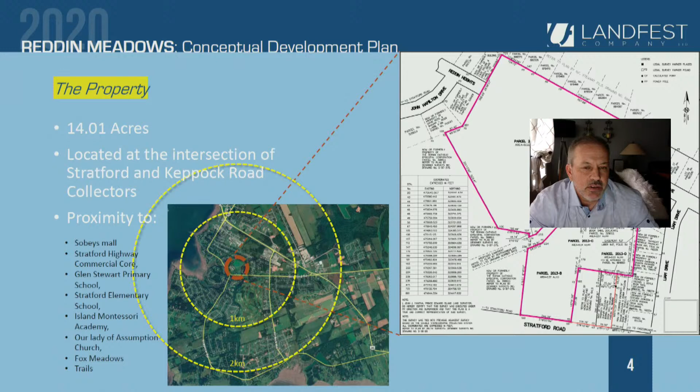I did want to refamiliarize you with the property. We've got roughly 14 acres of land located at the intersection of Stratford and Keppock Road collectors. For those of you who were at the November meeting, some of this presentation will sound a little familiar, but we anticipate there's probably some new listeners, so we're going to reintroduce some of this.

We think this is a pretty unique site, in part because of its proximity to Sobeys, the Stratford Town Centre, the highway and commercial core, and a number of elementary schools around it, including the Montessori Academy, Fox Meadows, and the AT trail that runs right through it. We believe this is a great parcel that could accommodate some density and would provide benefits, being close and within walking distance of all these facilities.

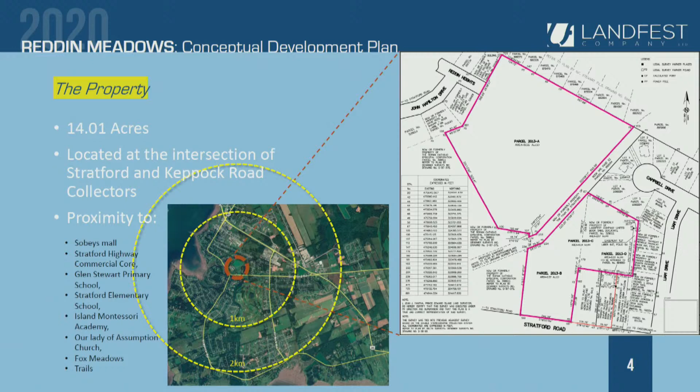Just to step back and give you a sense of how close we are to Sobeys and the highway - the AT collector runs and actually bisects the site, and the arrows there are indicating some of the drainage lines. We're fairly advantageous that this property drains into itself and not onto other properties, draining to that AT collector into a drainage swale that runs down south of the Assumption Parish.

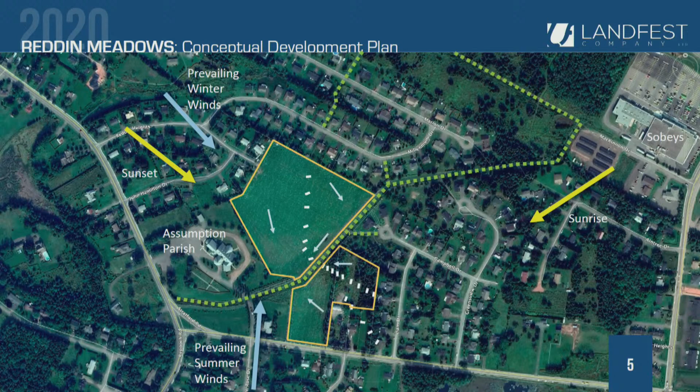As well, you'll see some yellow lines representing where sunrise comes up and sunset. The prevailing winds come from the south-southwest in the summer, and from the northwest and western directions in the winter.

When we looked at this property, its current zoning as R1, we were looking at the highest and best use. What we're proposing here is to move from 3 units per acre, which is permitted under the current R1, to a 5 unit per acre development. Previously, we had requested a 7 unit per acre development.

Looking at this urban transect, we are in an area that would not be considered rural. We're at the fringe of a suburban and a future urban generalized commercial zone. What we're proposing is a range of housing types to provide a range of housing affordability - in this case, some slightly smaller single-family homes and townhomes.

We have removed the multi-unit apartment building that was part of the original plan, and some of the semis that were part of the original plan. But we're still proposing a walkable neighborhood with sidewalks on one side of all of the streets. We want to preserve that unbroken trail corridor, that AT connector that runs right through the center of the site. And we're proposing a much increased open space. A 10% parkland dedication is fairly typical, but we're proposing a 30% parkland dedication with a forest preserve and some stormwater management areas.

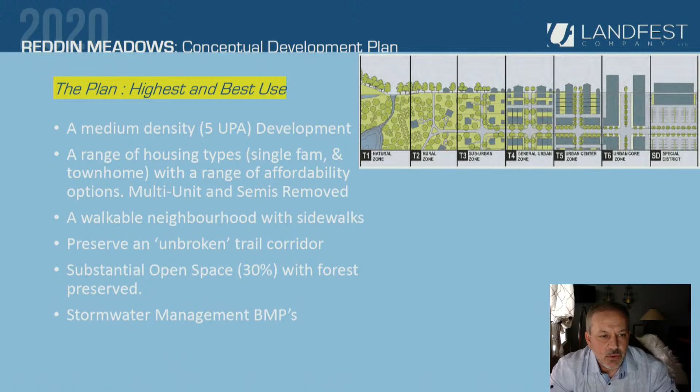So the land is currently, as Kevin noted, zoned as R1, and we're proposing to rezone it to PURD, which allows a little bit more flexibility in the housing types, unit types, and the affordability of units.

I did want to reiterate, back in our presentation in November, that Prince Edward Island continues to be the fastest growing province in Canada based on the last census, and Stratford is the fastest growing community at 13.2% in PEI, trailing just 2 other municipalities in all of Canada. So that rapid pace of growth, and trying to accommodate it in the best way possible, is part of the impetus for this plan we see tonight.

I did want to talk a bit about the difference of sprawl and urban growth. There's been a lot of writing and a lot of videos on this topic, and most planners consider urban sprawl one of the single greatest threats to environmental and economic sustainability.

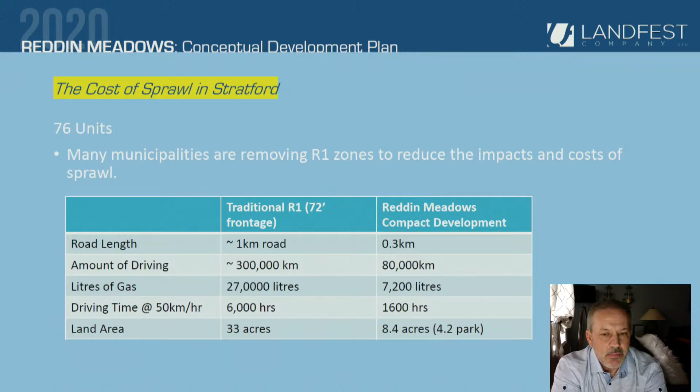You have to remember that on this 14-acre parcel, 30% is proposed as parkland, so about 4.2 acres are park. So when you compare the traditional R1 form to what we're proposing as a very modest change from the traditional R1, the benefits are fairly significant for the community.

So if we move to the next slide, again just reiterating, we're looking at creating a walkable community, moving from 3 units per acre to 5 units per acre.

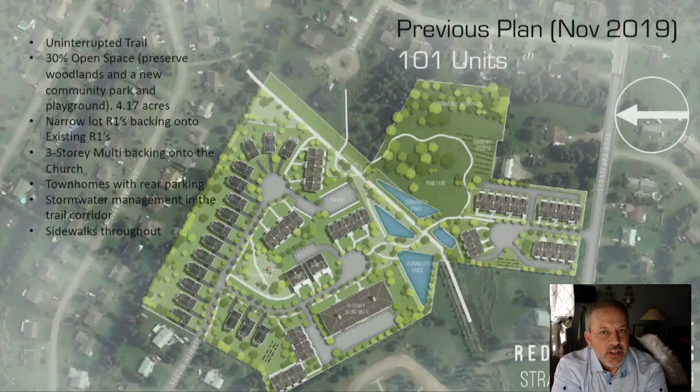If we move to the next slide, the old plan that was presented in November of 2019, you'll notice at that time we had proposed to maintain the AT network through the site, with stormwater ponds that were going to be park-like features but would also control runoff from the entire development. We're proposing 3 cul-de-sacs as part of this development, and part of that plan was to split some of the traffic onto Reddin Heights and onto Stratford Road, so that not all the traffic was moving through, eliminating any shortcutting through the neighborhood to get to other parts of the community.

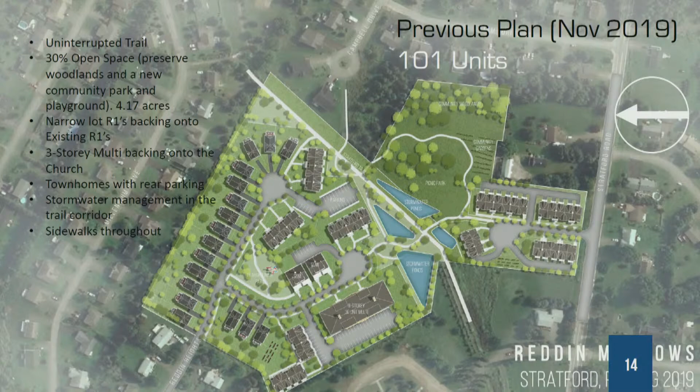So the new proposed plan, which you see here tonight — what you'll see is we've moved from the R1s proposed as 40 foot of frontage, and in discussions with the Planning Advisory Committee we've moved that back to 48 feet.

That eliminated one of the R1 units that backs onto Millennium Drive. We moved from a 3-foot and a 12-foot side yard, which we had previously, where the house is not in the middle of the lot, to now a 6-foot side yard and a 12-foot side yard.

So in total, we have 18 feet between each home. When we look at the current zoning requirement of 8 feet, that would create 16 feet between each home. So this actually separates the houses even more than the current R1 zoning, on a slightly narrower lot, from 72 feet down to 48 feet of frontage.

You'll also notice on this plan we've removed the multi-unit apartment building, replaced with townhomes. We've removed the 2 semi-units, replaced with a single townhome cluster. We had some properties where, for the most part, all the R1s that back on R1s now currently have R1s that back on the existing R1s. We had a condition in the southern corner where one of the townhomes backed onto the R1, and we've changed that plan and put an R1 in so that we can maintain all R1s backing onto R1s.

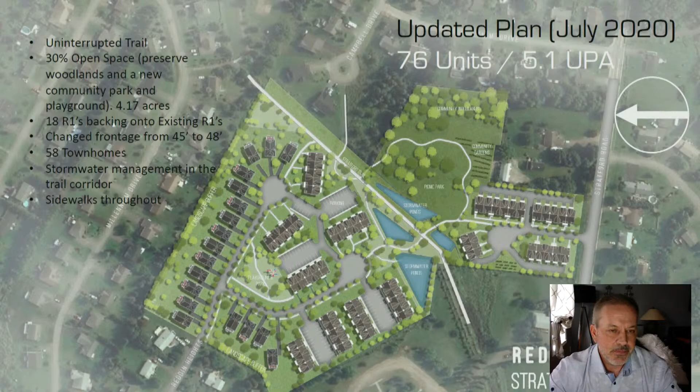We just had some views again. This would be kind of the sidewalk on one side, the street. You'll notice that we've pulled the townhomes and the R1 buildings a little closer to the street.

If we go to the next slide, we're proposing to require at least 4 trees on every lot that would be part of the development. And we're also proposing one caliper-sized street tree every 50 feet of road frontage on both sides of every street.

So the developer will be adding urban forest as part of this plan. On the left-hand side of the screen, you'll notice these new units, slightly narrower than the existing R1s. But what we've also done is pulled them closer to the street. There would be design standards to maintain the high standard of architectural design for these.

So what you see in this plan is any garages would have to be set back from the front of the unit so that we don't see all garages out front, and that homes would have verandas so that you're close to the street and able to talk to neighbors walking on these new sidewalks. So if we move to the next slide.

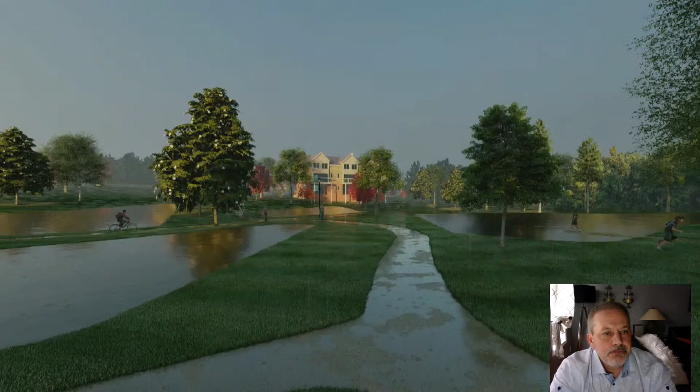And kind of a watery day looking at the stormwater management areas, which would be designed preliminarily as stormwater ponds as the site is being developed. These would hold any sediment and erosion control to keep any silt from moving from the site and keep it on site.

And then once the site is built out, they'd be transitioned into wet ponds. Some of them may be dry ponds. It depends on the drainage calculations and how much water can be provided as part of these.

But this is a view from one of the cul-de-sacs looking through that AT corridor. You see the bike path. And as part of the original plan, we thought it was more important to keep the connectivity of the AT connection without having to cross a road, rather than running the road through the middle of this and having people having to cross that road.

So that's part of the design scheme. Next slide.

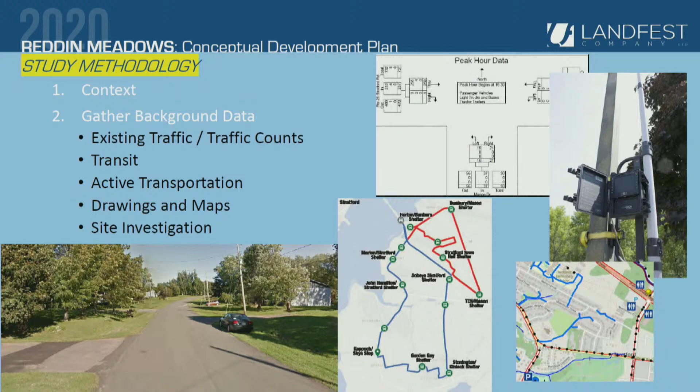It's called a Miovision, and it counts people, bikes, buses, cars, and trucks, allowing us to create a detailed traffic profile for the community. If you move to the next slide, we take that data into a traffic modeling application where we simulate the traffic using the existing counts, then add the new unit counts that will generate their own traffic, creating a very detailed simulation to look at impacts on all the intersections, surrounding roads, and regional road networks.

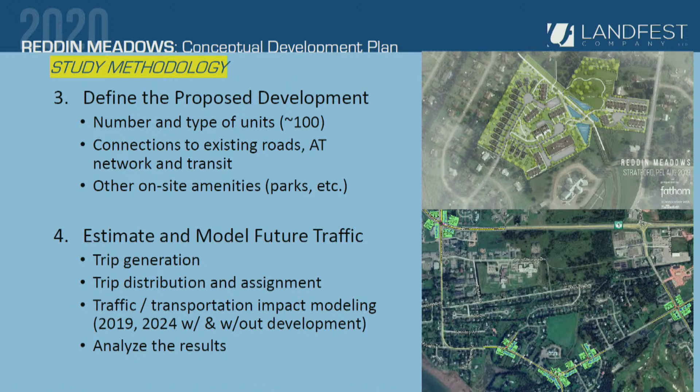And of course, this traffic study was done for 101 units. So if we move to the next slide...

What the traffic plan talks about is, very importantly, the connectivity of the Stratford Trail and maintaining the connected nature of the AT trail that runs through. The community already has excellent AT potential and transit connectivity, the development offers significant internal green space and amenities, and its proximity to schools means we don't have to get in cars. We can walk to Sobeys and to local schools on this connected AT network. The 76 units now generate relatively low volumes of new car traffic, and there is certainly available capacity on the adjacent streets to accommodate this new development.

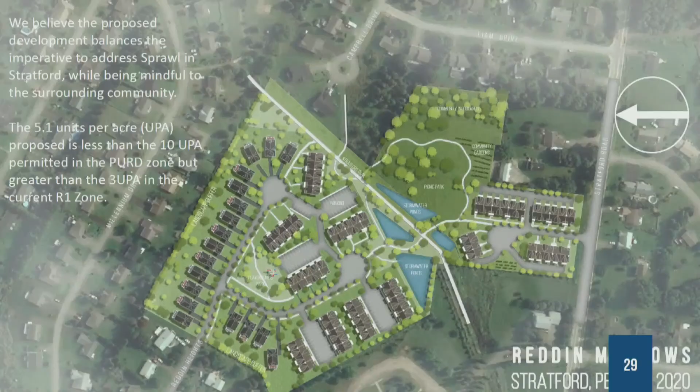If you look at the last home on Reddin Heights, which I'll point to on the screen here, right here, they are similar depths to the existing homes along Reddin Heights. It's just they're narrower along the frontage, with the exception of the ones up in the cul-de-sac.

Another issue I was told was when Millennium was being built, our septic is not deep enough, and one of my neighbor's septic was crushed with a big truck going up. And have they brought that into thought during the construction?

If John might be, if you want to run through your questions, we can make notes and then we can get him up to answer your questions. And the big one would be, is there going to be a second exit? One exit off is just unacceptable.

I don't know, Kevin, if anyone can speak to the history of that sewer line, or maybe what we can do, Ann, is get back to you on that particular piece and see if that would be an issue. We'd have to ask our infrastructure department on it, and I don't recall that, but it would be in a different department from where I work, so we'll certainly ask that question and get back to you.

My name is Danny Wood. I live at 29 Millennium. And I find myself here again, and I don't know why, because I haven't seen a whole lot of change from the first proposal that I was involved in back in 2019. Yes, the apartment building is gone, but it's replaced with townhouses in the lower meadow.

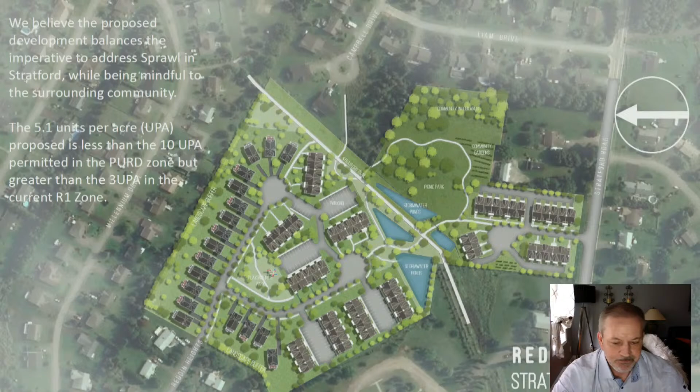Thanks, Rob. The mic is open. I did have a quick question come in from Bernadette Milner, 8 Keppoch Road. Once again, it's a quick one for John: will this development be done all at once or in a phased approach?

Well, two things. Back to traffic again, because that's obviously a concern for everybody in our community. It appears, and I think this came out at the last meeting, that there was a lot of concern about traffic in this area even without the development. That's where I brought up that we have to work with the town and the Department of Transportation on quieting techniques, because it sounds like they're needed there already. In order to accommodate more vehicles, and like Rob said, not many more than if we were just R1, we have to address this situation.

I was fortunate enough to travel in May to visit a new grandchild, and I was in Calgary in an established subdivision that had new artery roads built around it. I went around and looked at some of the quieting practices they've used—a lot of movable concrete medians and so on. I agree, someone said at the last meeting that a stop sign doesn't mean anything, people can roll through it. So we have to look at the problems and issues and address those, as Rob said, as a broader vision for the whole area, not just a magnifying glass on this one point.

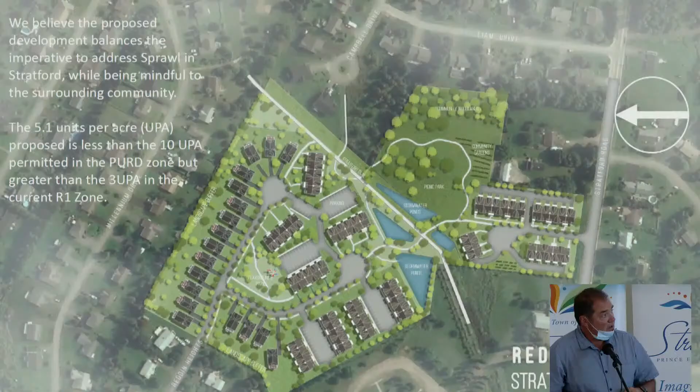As for the phased development approach, I call it A, B, and C. A being you develop off of Stratford Road first, which we hope would start later this fall or next spring. B would be the single-family homes in the central area and the central townhouses, and C would be the parcel and townhouses that border onto Assumption Parish. That answers that question. Thank you.

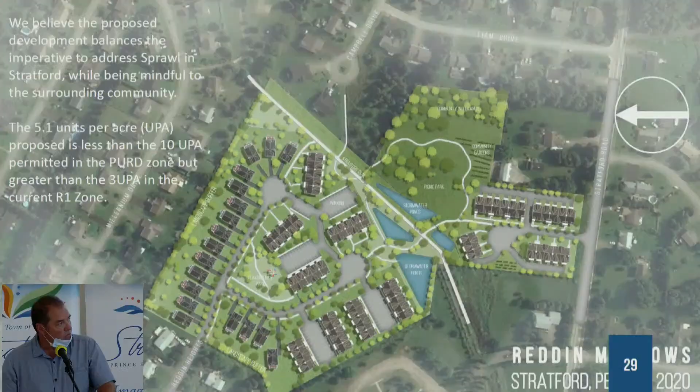The infrastructure, with the stormwater ponds and so on, we don't price until you have a set plan, so it's very hard to dictate a price at this point. But for a townhouse, for example, we're probably going to be $275 to $325 with today's current market. And for single-family homes, we're probably going to be $375 to $425.

I was just going to add, in comparison, look at what it costs to develop a 72-foot road frontage — that extra asphalt, 0.3 kilometers versus 1 kilometer, and you're on a bigger lot, a lot more costs. Doing a compact development is substantially less to build, relatively speaking.

All right, thank you. If you have any further questions or concerns, please email the planning department. Planning staff will be open to receive those for the next 7 days until July 22nd.

Next steps: we're going to receive all those submissions, and there's going to be a planning board meeting dedicated to this on August 3rd, 2020. They're going to take into consideration everything from the first public meeting through, and any comments received. There's no curtain put down after the first public meeting — every comment submitted since the start of this application will be reviewed and up for discussion. Coming out of that planning board meeting, if there's a recommendation that goes to council, then the next town council meeting for a decision would be August 12th, 2020. That's tentative, based on whether there is a recommendation that goes to council. And that's the next steps.

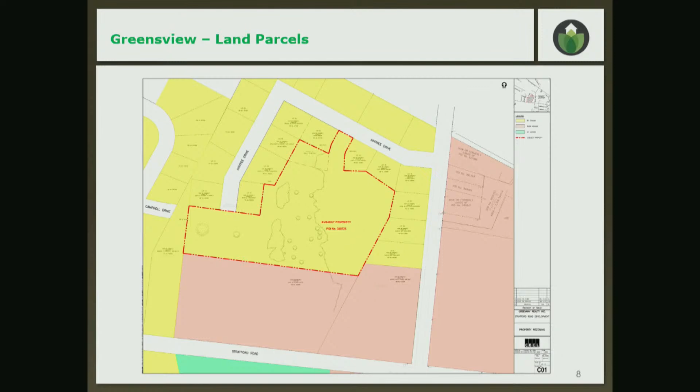So what we have up here right now is an overview of the land parcels. The rezoning portion of the development that Kevin is hoping to do is outlined in red up here. So that is sort of the remnant lands of this original subdivision when it occurred. When Aintree was built originally, there was a plan to have Campbell Drive come up through sort of a loop road up to Aintree and connect through there as single-family residential.

This lower area in pink is the existing PURD area. So what is being proposed is suitable for this area now. The upper area outlined in red would have to be rezoned to PURD to allow that entire development to happen.

The drawing that you guys were provided in your first mail-out package had 80 units in it, and right now we're looking more like 78 units. So that is a bit of a change, and it's outlined. There were some changes up here and down here that we'll talk about after.

If we could flip back, Kevin, if you don't mind, sorry. So this parcel here, currently zoned R1, would probably, if it was developed as single-family residential to current standards, result in about 18 lots. Probably, if some of that was duplex, would probably be about 20 units.

And as of right for this development, would allow the developer to really do that subdivision layout as long as they had 10% green space and some stormwater detention. Could really lay that out in any way as long as it met the zoning bylaws.

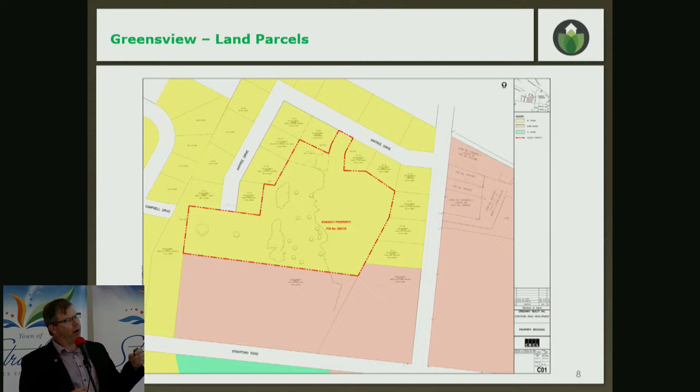The issue with that kind of a development would be that there's a potential that a lot of these valuable trees along this back area could really be eliminated if the developers so choose to do that. A benefit of this rezoning and public interaction is we get to understand what a lot of your important features are of this land, and we do certainly understand that along this area here is some of the nicer trees in the area, some of the older trees. So you'll see in our development plan trying to retain those.

So this is the plan that would have been sent out to you before we made a few changes, and we'll show those later.

Again, we're looking at single level garden homes. The whole entire development is in the order of 11.5 acres. And some of the features of the layout are that we've focused a lot of attention on green space, understanding that there's probably a desire to have a bit of a buffer between a development such as this with the single family residential. So you'll see we have about a 50 to 65 foot green buffer zone.

So it ranges in width because it's a little narrower there than it is down here. That is certainly an attempt to save some of those nice older mature trees, to provide a buffer, and to also provide some valuable green space. There is an intent, a desire to put a bit of a natural walking trail through there, if possible, and try to make that a real feature.

This green space also connects onto and links to the pond down here, and it's not so much a pond as a wetland. We've been in contact with the Department of Environment, and we understand what they envision is the footprint of that wetland. That wetland would be left basically as it is today, and that would also be linked in with the green space.

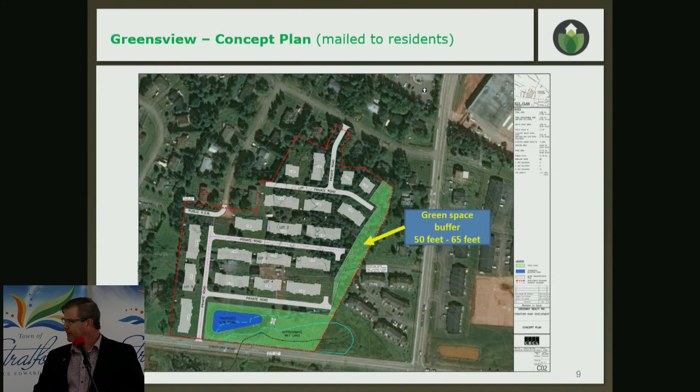I think that's the features, Kevin. Yep.

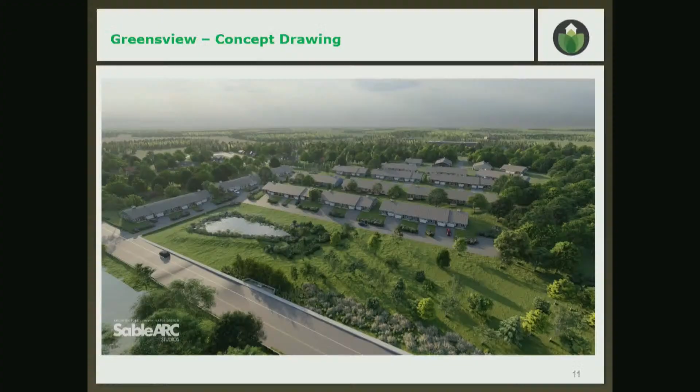This is a concept drawing done by our friends at SableARC Studios of what the community might look like from a drone-type view from Stratford Road. Down on Stratford Road, you can see how there's one connection where 56 of the units would come and go from the community in that corner. Further at the back of the property, you can see the one connection off of Aintree where 22 units would come and go from there.

So why Stratford and why this location? From our experience the last 5 or 6 years, there is significant demand for the single-level garden home here in Stratford. Almost all of our units have been rented well in advance of construction completion.

The town of Stratford, we really enjoy working here with the town. There's a proactive planning approach, and they're doing a great job of having good quality inventory available to help the town continue to prosper and grow. It's a great environment as a developer for us to work within, and it's another main reason we want to continue here in Stratford with this project and beyond.

In our opinion, it is the best location in Stratford for senior-friendly living, close to the golf courses, grocery stores, pharmacies, town hall, recreation centers, and just a few minutes from the QEH—all optimum features for that age group. There are many seniors within the community and outside that are looking to downsize, but not necessarily leave the community. They want to stay close to Stratford, close to family and friends, and have the opportunity to move into a living arrangement similar to their traditional single-family home, and these garden homes do provide that.

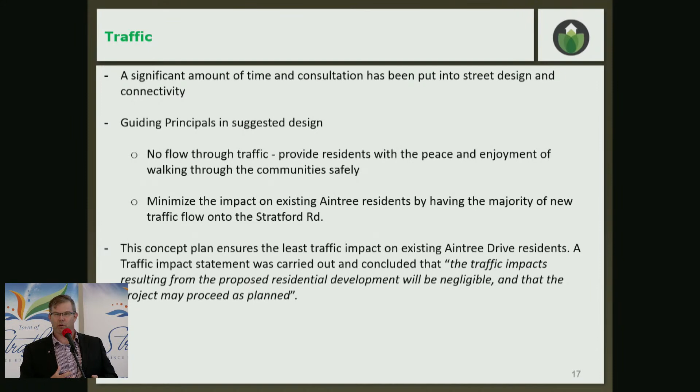What's on the next? So we did spend a significant amount of time looking at traffic. We do know that that's always important. I live on Keppoch Road in Stratford, so I have lots of traffic in front of my house. The only reason I bought it is there's about an 8-foot hedge there that kind of keeps me buffered from it, so we get it.

Some of the guiding principles we followed: we tried to not have through traffic in the development, and tried to have that peaceful, relaxing community that people can get out and walk and utilize, and also an area that local residents could come and walk through and enjoy as well. And of course, minimize the impact to the residents on Aintree as best we could. I guess in a nutshell, the impact is sort of negligible in terms of the number of vehicles you'd see during peak hours, although there would be a small increase.

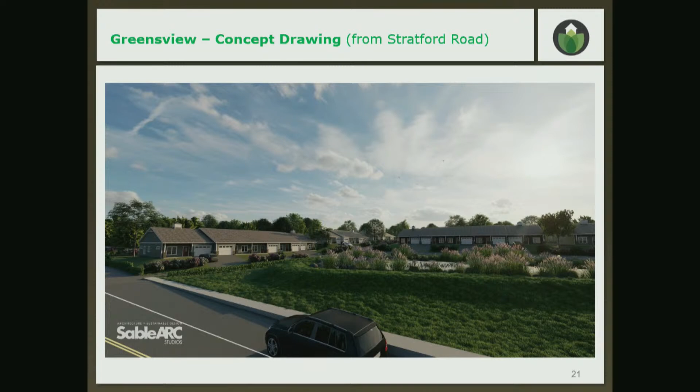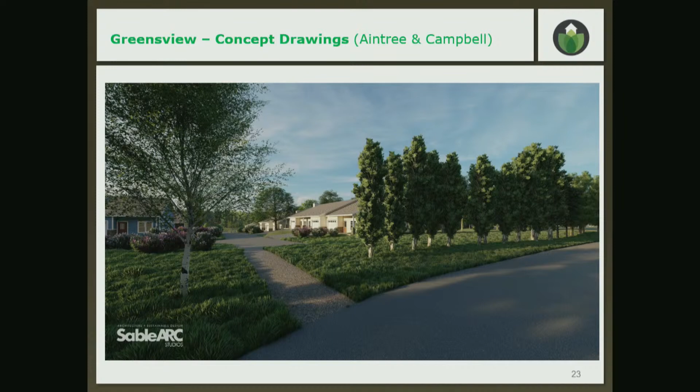So some key considerations with Greensview. Why is Greensview the right choice for existing neighbors in the area?

We target the 55 plus demographic, so there's lower volumes of traffic and reasonably quiet neighbors. The communities are professionally maintained with live-in property managers, and for anyone that does travel in the winter, hopefully the world gets back to that, we have people

that help look after the units and make sure things are taken care of while they're away. We want to be clear in the commitment that these will be completely single-level garden homes. It's a product that should be familiar to you, and if you haven't, we encourage you to go take a walk through Southside Greens and see what the community feel is like there.

That's what we're looking to recreate in Greensview. Greenway is an experienced builder with a track record of respecting the neighbors, certainly any guidelines put in place by the town for when heavy equipment can operate and any other related rules, we look to abide by them well.

From everything we hear and from our own opinion, all the Greenway builds are a high quality product. We have a good relationship with the town building inspector. Carter's here tonight. We have and do want to continue to follow all of the codes and guidelines put in place by the town to ensure we're delivering the best product we can. All the garden homes have air-to-air heat pumps, a good, safe, clean, environmentally friendly heating and air conditioning solution.

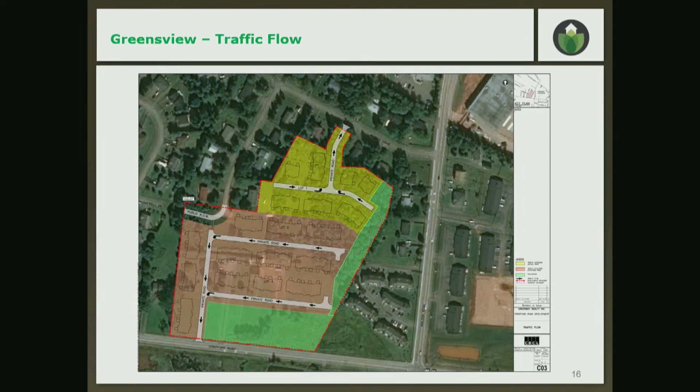Although they're disconnecting their private roads from the public road, the town does support the connection between the neighborhoods. At the end of the day, it's a Department of Transportation, Infrastructure and Energy, and town decision. We understand that's not what everybody necessarily agrees with, but there are reasons why we want the connections to happen.

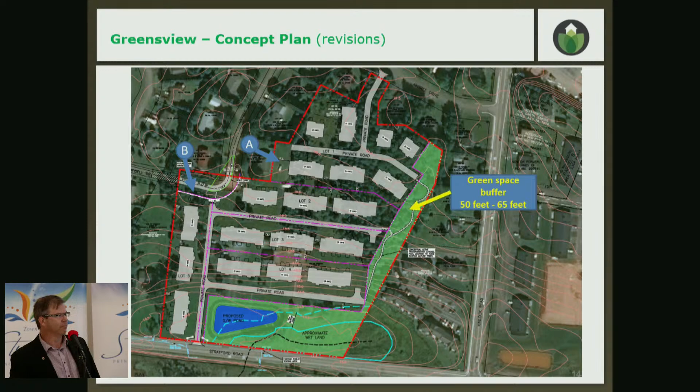Mic is open. Why don't you keep that?

The developers are talking about this green space they're putting up there behind the residences on Kinloch Road like it's some wonderful thing. Can we get you to remove your mask so anybody online can see your lips move? Thank you. Like it's some wonderful thing—it's old growth forest, the leaves are way up in the air. At ground level there's nothing but dead trees on the floor of the forest, and there's no privacy there.

He wants to put in 78 units behind us. My wife and I built this house in '74, we've lived there ever since. Around '75, something happened in the town of Southport—somebody was developing something, and I was concerned about all this property behind us, wondering if I'd end up with a factory in my backyard someday. I did a little checking and was told no, it's all zoned single-family dwellings, same as what you have. So for the last 45 years I've been fairly happy here, figuring that's all that's going to be behind us. But now they want to put this property in with an awful lot more people than single-family homes would be.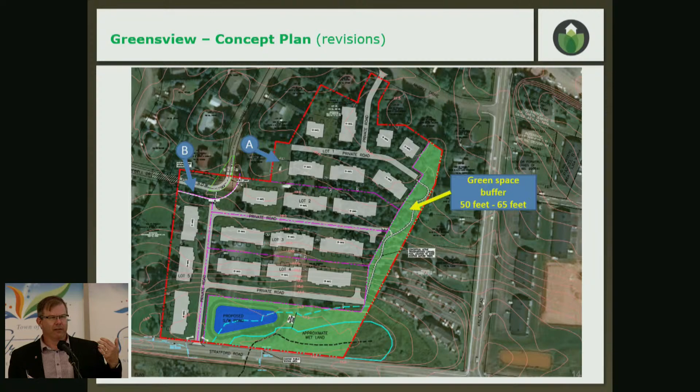I did want to have a quick comment on Keith's point about connectivity and connecting subdivisions. Living on Keppoch Road across from Pondside Park through its several phases, it certainly is something that can increase traffic flow through a subdivision and impact kids playing out front. But what I noticed with my own kids, growing up with Keppoch Road as the only main connector to their friends' subdivisions, was that once those subdivisions got connected, I felt much safer with my kids biking through residential streets, where speeds were more respected than on the Kinloch Road.

You can leave Aintree, get over to Campbell, get onto the trail system across the highway. So there are advantages there, though with every advantage there's sometimes a counterbalance. Just to jump on Keith's comment about connectivity, there are benefits as well.

Thank you, Jody. We are sitting at 8:57. Is there anyone who would like to speak before we start to wrap up?

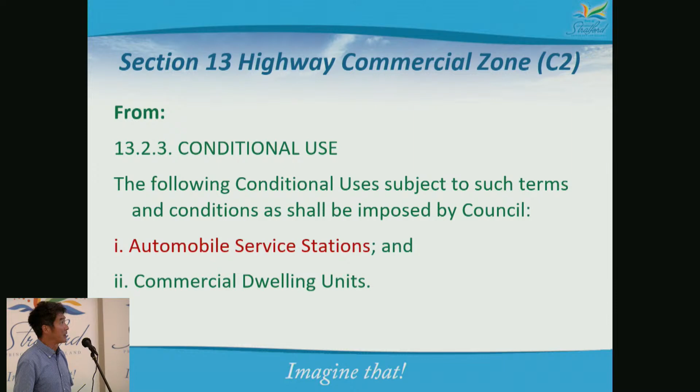Okay, so section 13, the highway commercial zone, C2. We're actually eliminating I, automobile service stations, because it was actually in twice - it was in conditional and it was also in special use. So we're taking that out of conditional, leaving it in special use. Therefore, because we have I and II, since we have only one now, we're changing II, which is commercial dwelling units. Now that it's standing by itself, it's now I, commercial dwelling units.

Really, like I said, they're very minor textual amendments, but we do need to occasionally do such housekeeping amendments to update the bylaw and bring it up to current standards. So this is what we have here. If there's any questions, feel free to contact the town.